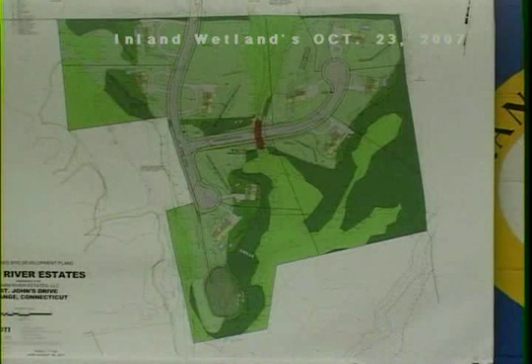Robert, you have more? I believe we've got one outstanding question from Diana with regards to the alternatives and looking at a bridge crossing for this general area up in here. Now, as part of when we took a look at the design options.

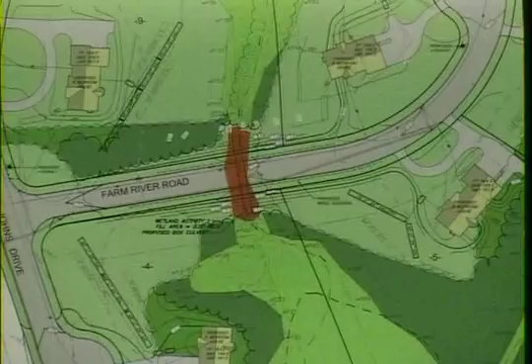Could I interrupt for a minute? This issue with Ed Lieberman, how was that going to be resolved then? Well, the only item that we have is that paragraph 1B, and I'm fully confident that what we've shown on the maps is the correct and proper way to do it. We will have to obviously meet with him, go over things for a third time with him, and then hopefully he'll be able to provide a favorable letter back to this commission. Okay, so we would get a letter back from him, one way or the other. Certainly, the letter's beyond my control, but that's certainly what we would hope to accomplish.

Scott, are you with us on that? That correspondence from Ed may be at least an indication of satisfying the question that Jim just had? That is something I anticipate coming, but given that it's something that is coming from staff within town, you can't force him to write it. Well, I wasn't going to say that. What I was going to say is that if anyone was inclined to hold up their thoughts on this project as a result of that, it's not necessary to do so, is all I'm advising at this point.

So, again, as far as the topo maps that we have on file in the town hall depicting the elevations, they were done in 95 by FEMA, and they're extremely accurate to within a half a foot. So again, I feel, at least for lots 4 and 5, that because of the topos and the slopes, flooding is not going to be an issue towards any of these properties. So take that for what it's worth. But certainly, yes, at some point there should be a letter coming down from that office.

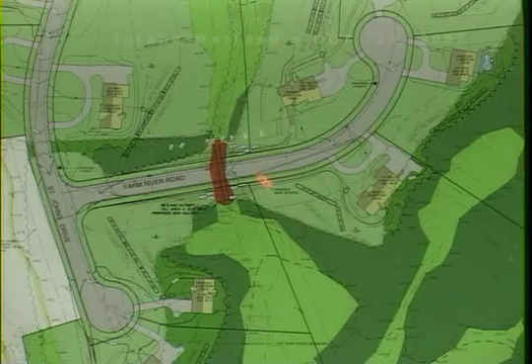They do convey water down across this crossing. If we were to get into a clear span provision, we would lose that ability to convey this stormwater runoff from this area here to the detention basin. So it would make providing for that zero increase in stormwater runoff from a peak discharge perspective virtually impossible, because in essence this crossing gives us the ability to convey water from this ridge line in this upland area from point A to point B.

So that was one of the other reasons why we really didn't consider the clear spanning of that wetlands system to be feasible, because then that would negate the stormwater conveyance within that area there. So those were basically the 3 or 4 options that we looked at, and this is what we arrived at, and we felt that this was the best compromise between environmental concerns as well as drainage concerns in coming up with the 5-foot by 8-foot box culvert.

Robert, if I recall correctly, that's about 3,000 square feet to be filled. What is the greater area of disturbance for all the work that will be needed while the fill's going in, the construction of the road, putting in the catch basins, in that red-lined area? What is inside that red line, that represents the .07 acres. Yeah, well, that's about 3,000 square feet that will be, as you call it, filled. But what about the work that's necessary? That area includes the work.

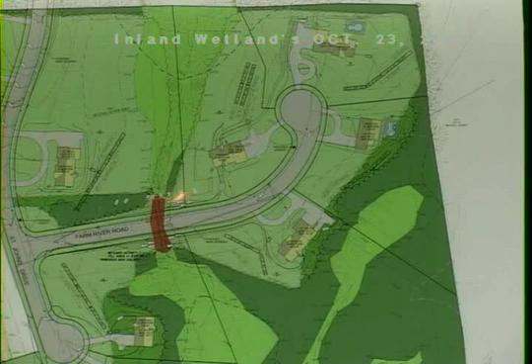And again, with the type of structure that we've got proposed in here, you're not going to go through the level of disturbance that you would if you were trying to put in a bridge structure here. It's a relatively small box culvert, 5 by 8. It's not an excessive weight. It's something that a normal backhoe should be capable of placing on site. There's no special foundations required for this. There's no special footings at all. Basically, it'll be to get into this area, excavate and stockpile the wetland substrate material for reuse within the culvert once that's placed.

What's the third dimension of the 5 by 8 culvert? Does it have a length? I believe it's approximately 96 feet long. Thank you. Anyone else?

Yeah, the box culvert will have some kind of structure to carry the stormwater runoff through it? Well, the box culvert is basically, if you can envision, 5 feet high. This board is roughly 3 feet high. So the height would be up to about here. Try to talk to the mic, please. Okay. So the height would be up to about here, and this board is 4 feet wide, so it'd be double the board through here.

Now again, the bottom of the culvert, what we're anticipating, the bottom 18 inches of the culvert is going to be filled back in with that wetland substrate material. So it'll help maintain the integrity and the regime as what's upstream and downstream to help with the environmental and the migration going through that area.

So the catch basin piping from CB8, I guess it is? How does that pipe... You're referring to this catch basin running here? Right. That catch basin piping will actually be on top of the box culvert. It won't go through it or under it. That's been designed so it's actually up above it. If you look at the topos, you'll see there's about 4 foot of cover over the top. Okay.

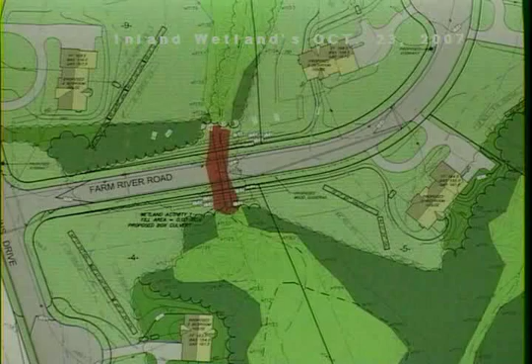So what's the grade in top of the catch basin pipe to grade? The grade of the road, just by way of example, the catch basin in this area here is approximately elevation 162 for the finished grade. I think the other issue, and what you were talking about, is you've got the 4 lots up here, and basically it looks like it's on top of a little hill. And no matter what you do, you've got to get that water out of there. It's got to go someplace, otherwise you're going to start pushing it towards too many different spots in the wetlands.

I mean, if you looked at, let's say, just lot 6, if that's higher, if you don't have this structure here, like you said, if you have a bridge, you're going to lose that ability to pull that water back across down into your detention pond. Right. And otherwise, what are you going to do with the water? You're going to start shooting it out into...

Well, yeah, and again, that's part of what we looked at in the design process, and with the area that's up in here, and the nature that there really isn't one common discharge point from this 4.7 acres of land. There was no easy place to collect it all in one place to try to get, say, a secondary detention basin up in here. But this area being at a higher elevation than what we're looking at here, it seemed to make sense to try to get this roadway system and the immediate area around it to collect as much of it as we could and then convey it down to the detention basin.

Anything more, Robert? I think that's it, unless there are other questions from the commission. Commissioners, any thoughts or questions? Robert, I have several, actually, that I'd like to use your expertise in referring to the drainage report. Reading it, it was perplexing to me because there were a lot of abbreviations that I don't understand. For example, what's the difference between a TR55 and a TR20 calculations?

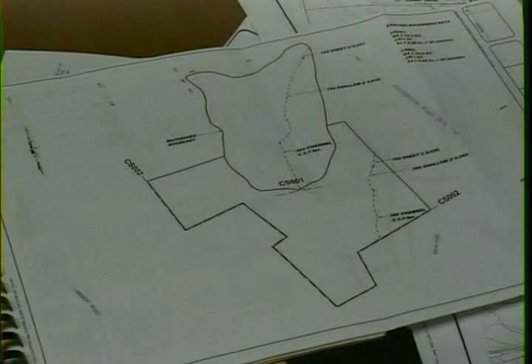And then if you look at the data that goes with it, there's a drainage area that's associated with that outline, there's a runoff curve number, which is associated with that drainage area, and a time of concentration. And those are the three principal components that get plugged into the computer program to do the modeling, which then gives you the peak discharge rates and runoff values associated with it.

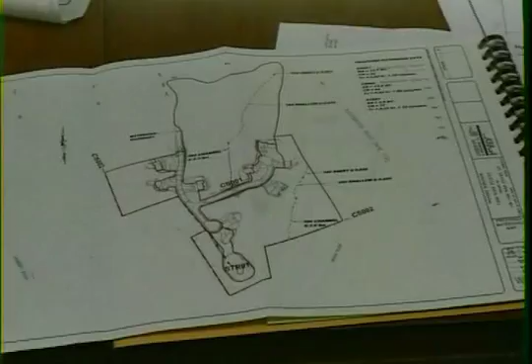If you take a look over on the next page, which is sheet 20, that's basically the same thing, except these are the proposed conditions. So we still have the cross-section 001. And if you take a look at the fine print, what you would notice between the pre and post, the drainage areas are slightly different. Because again, some of the houses and things like that are taken out from the pre and post, so there's a little bit of a difference there.

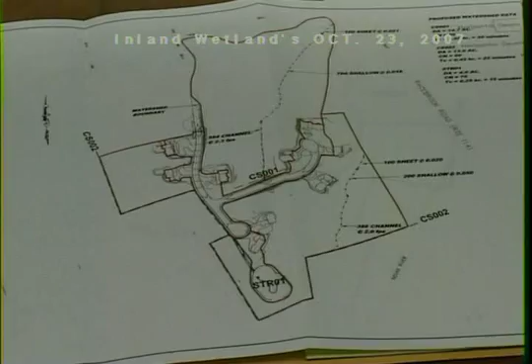And what's probably most prominent on there is that STR01, which is in essence the detention basin on Lot 3. So that's put in there for modeling purposes, and to basically come up with peak discharge rates that would be going out of that, as well as coming up with the stage storage discharge relationship for the storm event.

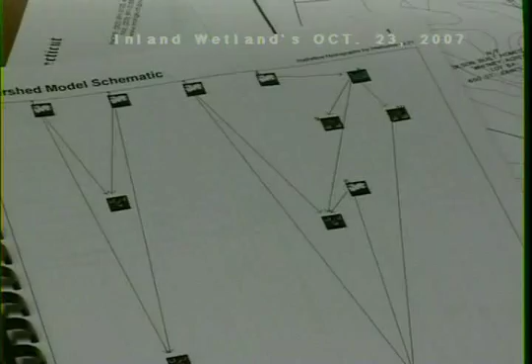What is on 2 pages after that? The watershed model schematic. Yeah, as you see, it's this, if you can see it. A bunch of computer gobbledygook. What is that? This is basically the computer program, the way that they give you the schematic model, which if you were to take a look at the 2 watershed maps that you looked at before, it's pretty much the same thing. It's just shown in more of a block diagram.

So all the way over to the left, you have where it says 1 and 2 up on top. Those are basically the same thing. And if you look at the designations, like 1 is CS001. Right. Block number 2 is CS002. And then you could just see how each of those hydrographs are pulled together and where they basically flow in terms of the computer program. So the arrows are flow of water? That's what I didn't understand, what the arrows were pointing at.

Well, if you take a look at that block diagram 1, okay, that represents that cross-section 1, which is that larger watershed area. And what it does, it calculates... Let me, if I can just interrupt, I don't know if you can show for the viewers at home what I'm talking about. I have no idea what that means. You got that? All right. I'm sorry, I was just totally confused.

Right, so what that's basically showing is that for block diagram 1, that is a drainage area, it computes a hydrograph at that drainage area, and that's it. So after it computes the hydrograph at that point, it needs to know what to do with that flow beyond that. And that's where that secondary arrow comes out of the bottom of that. It shows how that hydrograph is combined with the other ones and routed through. I just don't like the depiction. It's just arrows pointing to boxes that look like clouds and red dots. Sorry. I'd like the map better.

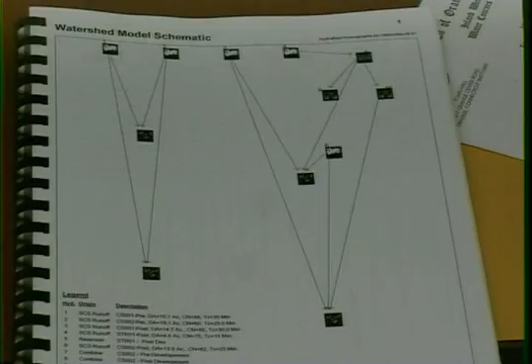All right, let's go to a hydrograph report. Let's skip all the way to the 100-year storm, the big one. And if you'll just run us through one of those, please. Do we have a page number you want to start on? Yeah, if I remember correctly, it's in the 60s, 56 to 60, something like that. Let's look there. No, I think we're probably more up in the... Is it higher? No, it's in the 60s. No, we're up on page 78.

Well, before you go there, let me start, there's one before that. Oh, wait a minute, I'm looking at the top of the page, rather than the bottom. Yeah, look at the bottom, the bottom is what's really indexed better. Yeah, then that's page 83. At the top, it says 61, the bottom says 83. Right, okay, actually, we're going to start back up a few pages before that on 78. Good. Works for me.

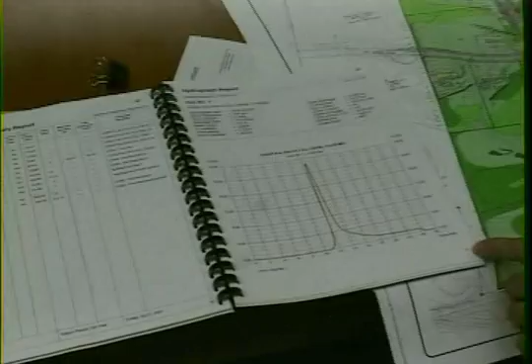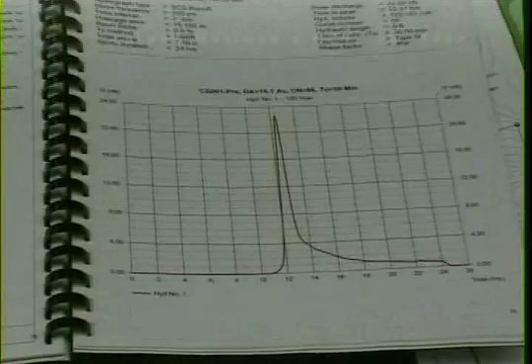And on page 78, what you have there is basically the hydrograph summary report for the 100-year return period. What you'll see listed in the table there is that you have 13 hydrographs that were computed as part of the computer program. These hydrographs contain both the pre and post development, so you do have to take a look at the hydrograph descriptions to really have an idea of how everything is pulled together.

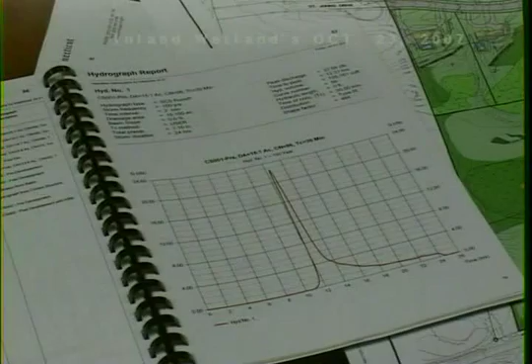So if you were to take a look at the summary report, and again, all this remains consistent, if you look at the hydrograph description, hydrograph number 1 represents cross-section 001. If you take a look in there for the 100-year storm, at the third column, the computer program has calculated a peak flow of 22.6 CFS. Then if you bounce down to the second one, which is CS002, it's calculated a 100-year peak flow rate of 34 CFS.

Now, if you want to take a look at the combined flows for those two hydrographs, where it basically gets the two of them combined, then you're gonna bounce down to hydrograph number 7. All right, stop right there. Let's just pick the very first one. If I'm looking at the graph on page 79, that corresponds to the first one. Going across the bottom, you have 26 hours. What is happening in the first 10 hours? Nothing? Pretty much. I'm sure if this commission has asked for these reports from other applicants in the past, these graphs are pretty standard and typical. Yeah, I just want to understand it.

It's characteristic of a Type 3 SCS storm, where if you look at that spike that typically occurs between the 11th and 13th or 14th hour, what the models and formulas tell you is that the majority of your rainfall event occurs over a very short period of time, over that hour and a half or 2 hours. So even though it's referred to as a 24-hour storm, for the purpose of the modeling and for generating peak rates of discharge, it's assumed, and it's characteristic of the shape of this curve, that the majority of that rainfall occurs over a very short period of time.

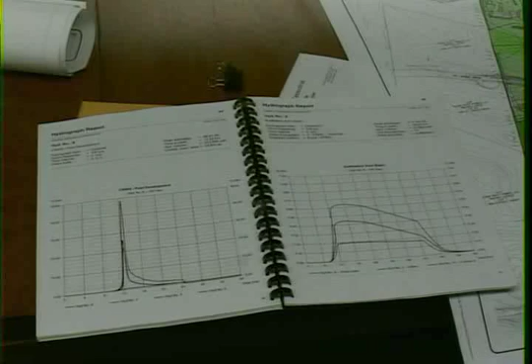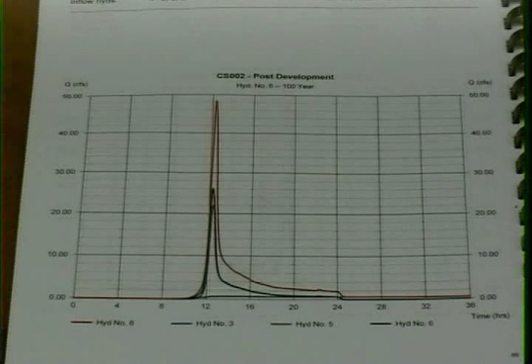Okay. So the one that you're looking at on page 86 is hydrograph number 8. This is a post-development hydrograph, which combines hydrographs numbers 3, 5, and 6. Just for your point of clarification, that is combining CS001 post-development, Structure 1 post-development, and then it's also providing for the routing through Structure 1, which is doing a reservoir routing. That's why you've got the multitude of curves on that area. If you take a look at the red line, which represents the peak up around 48.1, that is the culmination of the two hydrographs coming in. So that would be the summation of cross-section 1 and the detention basin.

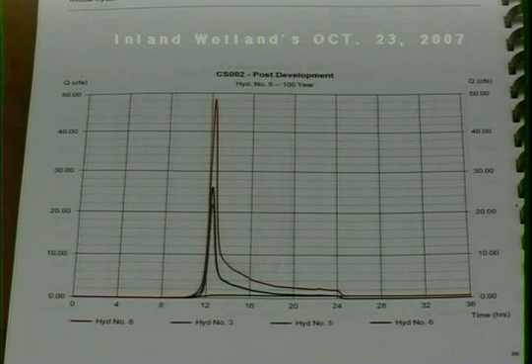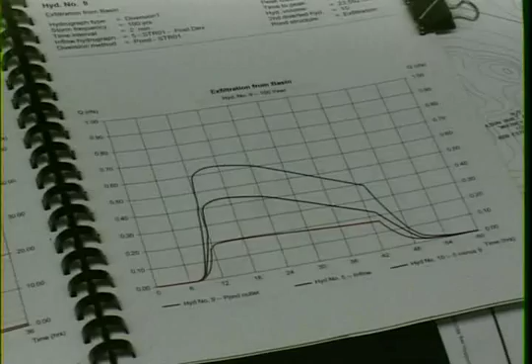And what does page 87 show then? Now, page 87 shows that one of the analysis conditions that we looked at was if we considered exfiltration going out through the bottom of the basin, which we ran as an analysis. It's not what we based our summary numbers or tables on. But this is what the exfiltration rate through that detention basin would look like if applied to the hydrographs for

that particular basin. Is that what you use to determine whether it's going to be breached? No, this has nothing to do with the breaching. What this has more to do with is taking a look at volume from that particular area. So if the bottom of that basin has a gravelly, sandy area, in addition to storing the water, it also has an opportunity to percolate out or infiltrate into the ground around it.

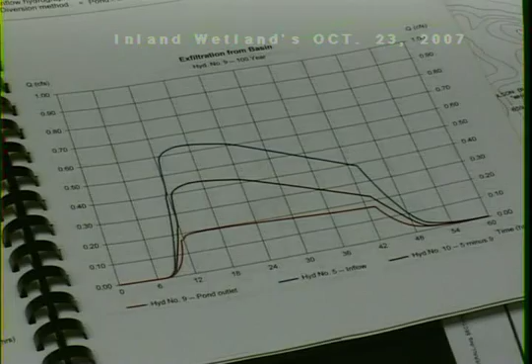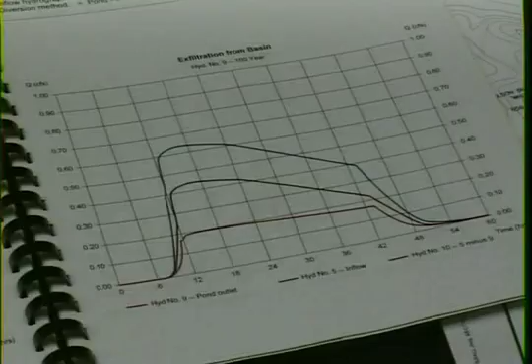Now, normally when we do the design analysis on this, and that's the case in the summary numbers that we've given you in the report, we go on the assumption that this basin has like an impervious liner, whether it's plastic, concrete, or whatever. No water goes out through the bottom of the basin. The only way water gets out of the basin is through the control structure itself. And that's quite honestly the most conservative way to design it, to assume that you have no water infiltrating into the surrounding ground area.

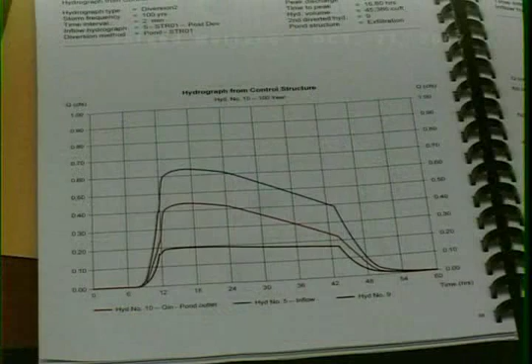So then the flip of that is if it weren't impervious, this is what would happen. Correct. Gotcha, now that makes sense. And what's the difference then, I think this is my last question, on page 88, from the control structure, what's that versus the basin? Well, this would include the peak discharges leaving the control structure in this location. So this includes the water going out through the control structure, as well as what would be infiltrating into the ground. So it's a combination of those two. That's combined, right.

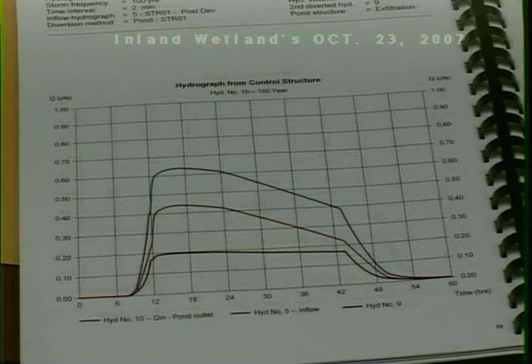They are similar, and it looks like you did it over 60 hours. That's enough for now. There was a footnote I wanted to ask about, but I don't remember where it is. I'll find it. If anyone else wants to jump in, please. Diana, please.

On page 4, you've got the pre and post peak flows. So following up with the 100-year storm, it looks like the existing is 49 and the proposed is 34. Right. Do you have hydrographs that reflect those so that we can compare the hydrographs? Certainly do. All I gotta do is find them. Oh, here it is right here. I don't know what this means. What the heck does that mean?

Okay, for the existing conditions and the 49 CFS, it's basically going to be any of the hydrograph 13s for the 2 through 100-year event. So if you're looking for the 100-year, just bounce back to that. That's going to be on page 90. That would be the combined with the post-development. And then on page 89, that would be the combined with pre-development.

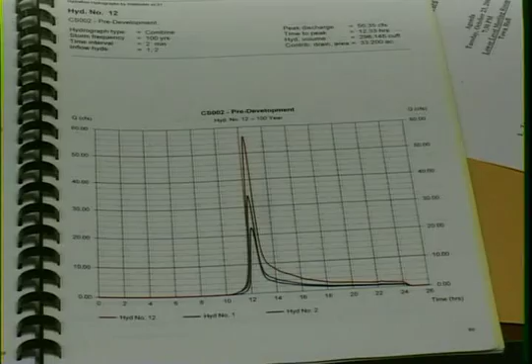part of this report. In designing the peak flow rates, we didn't consider any infiltration or exfiltration from the detention basin in the calculations. In terms of runoff volume, we've got the rooftop galleries, which have not been factored into the calculations, so that tends to be very conservative. And I'd have to find the numbers, but we took a value based upon the percolation test we had out there for the septic systems and applied a safety factor to arrive at an anticipated infiltration or exfiltration rate out of the basin.

And that's where some of the other charts that we were looking at came in. So if you go back to the summary tables, there would be runoff volume actually calculated in those tables that goes back into the ground. I don't believe in the report I actually summarized that, though, to see if we met a zero increase in runoff volume. But like you said, if you take a look at the hydrographs, they're reasonably close.

I did find the footnote, it was on page 4, under the combined flow, and it just says footnote number 1, right at the very top. If you could read it and explain what that is. Yeah, that's very easy, and this is quite common. The thing that quite threw me, it says it's to the perimeter of the property.

Right. What the footnote says is flows indicated are for point discharges. For this particular watershed, the flows are dispersed along the perimeter of the property or watershed boundary. Okay. Probably the best way of looking at this, if we look at that area for CS 001, which is basically the area that's tributary to the roadway crossing, that would be considered a point discharge because that entire watershed area culminates right here. So everything comes down to this given location.

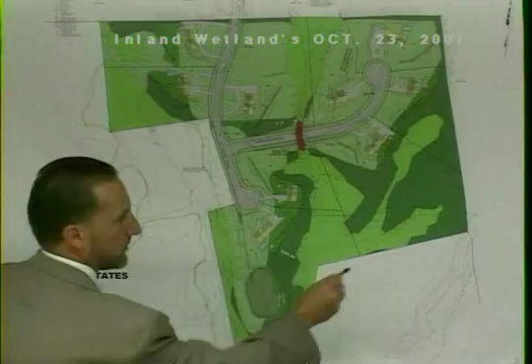So if the calculations say that we have 20 CFS for that given watershed, that 20 CFS occurs right at that point. Now, when we take a look at cross-section 002, which basically comes around the perimeter, if we have that same 20 CFS for the sake of argument, it's not at any one given point. It's dispersed along the perimeter because there is no single point discharge leaving that area of the site.

Oh, I see, because that's only talking about cross-section 002 at that point. Right. Gotcha. Because if you're going to try to get all this down to a common point, we'd have to analyze a much larger watershed that would include a lot of the offsite area, which really has no bearing on the sizing of this basin.

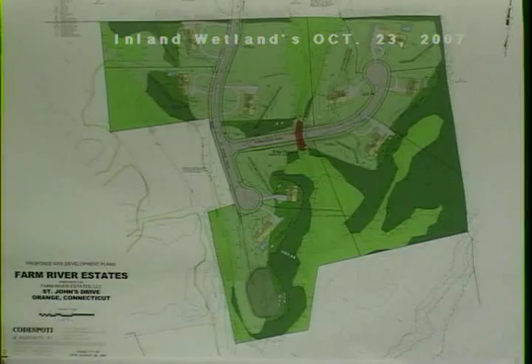I'm with you. Anyone else? Scott? Diana?

I have some questions about consideration of alternatives for specific lots. On SP3, on the soil erosion plan, the silt fence is pretty much the limit of disturbance, I'm assuming, and in some areas, like on Lot 5, it's 8 feet. On Lot 4, it's 15 feet? Diana, help me there. What's on that lot 5, 8 feet? The limit of disturbance to the wetland. If you look at the erosion control plan, you can see that. Okay. Now, that vegetation there that's going to be cleared, is that full-size trees over there?

Well, let's back up for 1 second. I think Mr. Codespoti hit on this during his presentation. If you take a look at the existing conditions of the site, and probably your colored-up drawing would be the best one there, the vast majority of the site development is not taking place within the wooded area. Almost all the roadway construction and the houses are within the farmed or cropland areas. Even on Lot 5, the house itself is within the cleared area.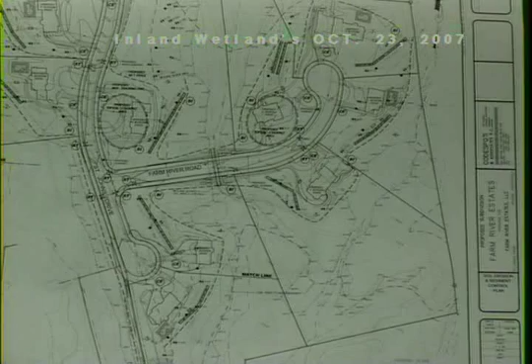Yeah, as far as what would be lost in that area, we haven't done a tree count or to know the actual locations of which trees would go. The one comment that I would make is just given the orientation of this area here, I don't foresee that there would be any direct impact to the wetlands here because any of the canopy that's lost in this area here would basically be on the northerly side of the wetlands. So in terms of the loss from additional sunlight being introduced into the wetlands, I would be more concerned if you're losing tree canopy on the south side of the wetlands as opposed to the north or west side of it.

Well, it is the west side too, but then it's not just that, it's also the activities there to put the gallery in and the grading. We're removing the microtopography under the trees that slow the water down, clean it, cool it before it gets into there, and then it's just going to really be lawn. I'm just concerned about the closeness of some of these to the wetlands.

Similarly, Robert, did you ever do any calculations or come up with a quantitative measurement of how much water a tree may drink such that if you remove trees upstream, the downstream people see the result that their water rises faster? I've never done any. Yeah. I don't know if Mr. Abrams is here. He may. Yeah, well, I don't know if he could venture a guess. I can't quantify it either, but I'd be very concerned about the number of trees being lost as well.

Robert, I have a question. I think the last time that you were here, I had asked the question about, technically this is hypothetical. I mean, each lot, the house that you put on is a hypothetical situation, meaning that you'll sell one lot, someone's going to have to come back in with a plan and talk about it possibly from that point forward. Are these houses and driveways maximized to whatever the degree is that they can be built as big as they can be built? And were those the calculations that were used for figuring the runoff going down into the detention pond?

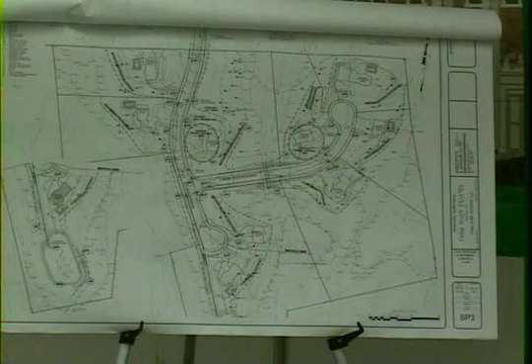Lot 9 is, I'm trying to find it, it's a couple acres, 3 acres or something, I believe. For you to sketch on the back of one of these drawings the starting contour of where the bottom of the culvert would be, and then what the final contour would be relative to what's

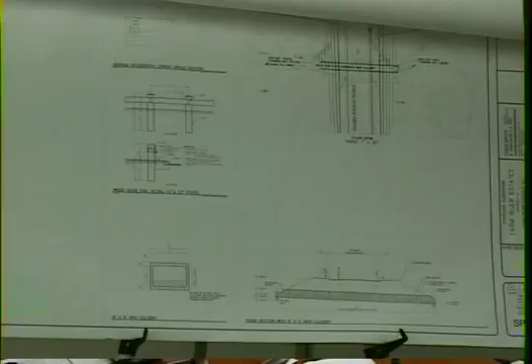The drain coming through looks like it's 152 feet. That sheet has to be 8. I must have an old drawing, because I don't have. Must be 8. Oh, because it's tilted down. It's tilted. I was wondering why they were two different on each end, of course.

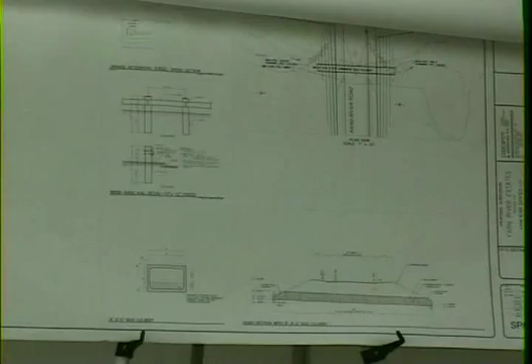Bob, I don't know where Commissioner Ewan wants to go with that at the moment, but while he's pondering that, I do also, after my site walk, have some really great concerns with Lot 5 and the location of that house and its proximity to the wetland. And I was curious if there was any other way to reposition the house on the lot to pull it away. I see it is quite close to the 50-foot front setback.

But can it be relocated, downsized, septic put in another area, something, because it's just not going to work, in my opinion, for the people that are going to live there. It's just not what they're going to be expecting, and I'm sure this is going to be probably a $1 million edifice by the time we're done, and they're just not going to have any yard, period. And I foresee that it's going to be turned into lawn area before anybody even knows it. I'm really distressed by that.

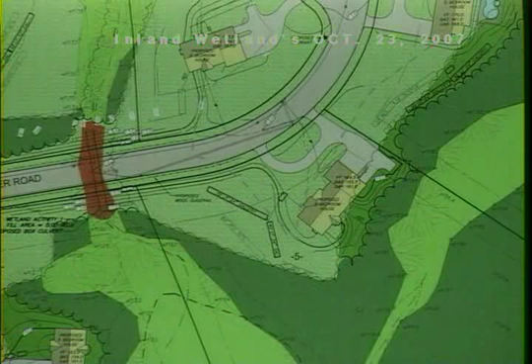I had a concern with that also, because when I looked at the driveway, the contour line that follows pretty much just to the corner of the house there, it's like at 162, and then it drops to 160 when you're going back towards the wetland area. By the looks of it, you're almost going to get down to maybe 154 by the slope of the driveway there. And I'm sure there's ways to build it up and to pull the water back out, but again, that looks like a quick exit down to the wetland area down there.

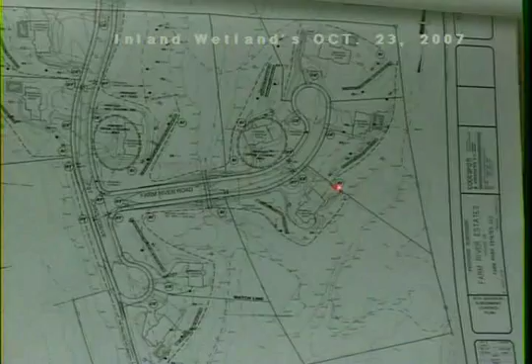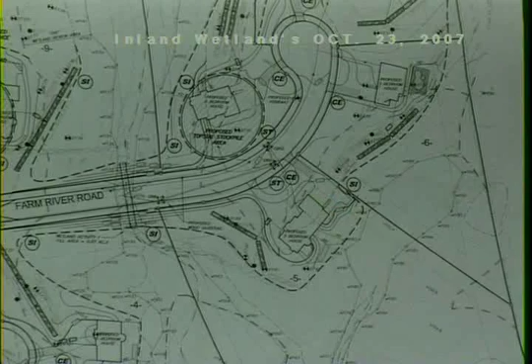Well, actually, up in that corner, there's a small retaining wall at the end of the driveway. Because what you'll see is that just on the uphill side of the garage, you're at elevation 162 with that contour. And the driveway grades are going to carry down to right where the 160 is. And that's basically the flow path for the runoff from that area. But right at the hammerhead on that driveway, if you take a look at the grades that drop down, you'll see how the contour lines blend into that solid line there. That solid line would represent a small retaining wall to help with the grading transition

in that immediate area. You mean as far as bringing that back end up? Right, that's what I thought. Well, yeah, it's not going to bring it back up and pitch it to the road. But instead of having a very steep driveway leading down to the wetlands, you want to have that relatively flat so that you don't have any problems with vehicles and icing and things like that. So that's why this is relatively flat in here, and then this slopes off in a more gentle way, but right at the hammerhead, because that tends to compress that area, you'll have a small retaining wall.

Well, it gets into, if you just looked at plowing in the winter, salt or whatever could get put into that area. If it gets pushed and you do have a small retaining wall, it gets pushed over the retaining wall down towards the wetlands. It's not that far from that. Yes, you do have a buffer zone with the trees and stuff. I don't know that there is. Right there. Yeah.

That's one of the things I just noticed, that's all. Yeah, I think to address Scott's comments, we did have an alternate for lot number 5 that we looked at, where we basically had the house mirrored and flipped around, but it really didn't gain all that much, because what it tended to do is push more fill over towards the septic side. And I think in terms of just having a usable backyard area, it got it that much closer to the wetlands as opposed to what was laid out there.

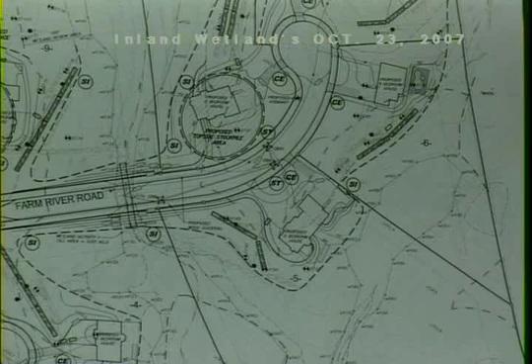Let me check in my folder and see if I have that sketch, to see if it's something that you may have been looking for. And was that the only place that deep test holes were done? I'll wait for you to get back. I don't have much choice. We're going to take a look to see if we have that alternate sketch.

Well, I'm looking at going across the driveway area. I don't see any test holes there. Were any test holes dug in that area to see if the septic could go on the other side and this house be rotated so that it was cocked in more towards the stone wall? No, because initially when we did the lot layouts, we did take a look at that. And because of the spread lengths that were available up in that area, it wasn't an area that was really conducive to trying to lay a septic system out. We just didn't have enough length to go back in that direction.

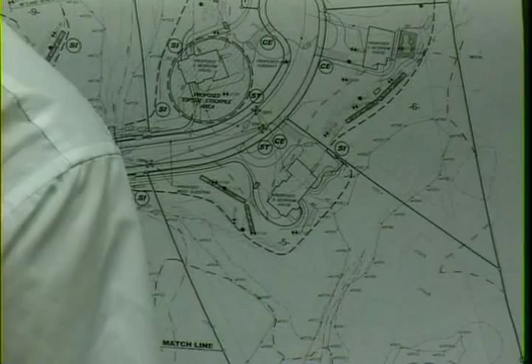Scott, what is the distance, your best guess, from the house to the wetlands on lot 5? Sorry, what is your distance? Scale? It's also got more sides on it than I want to guess at. Well, we're at a 50 scale here on this one. Which is the 50 scale? Help me, I don't know. That'll be easier. Here, try that. But I'm going to guess, without even looking, it's something like 40 feet. It's not even 50, might even be less than that.

But from the house on lot 5 to the wetlands? Yeah, I don't have my scale now. Here, use this one, it's bigger. So it looks like the house is at least 50 feet away. Yeah, the house itself is, but your point is, if the driveway's closer than that, there's no yard, snow plowing, and to the extent that a new homeowner goes in there, what is the future of that area going to be? The grading below the driveway is about 20 feet. The gallery is about 25 feet.

You know, once somebody gets in there, they're going to want to put lawn as far as they can get it. And there are other properties that are very close too. There's lot 4, lot 2, where the footing drain is outletting, although that can be pulled back, but I'm concerned there too about the trees that are having to be removed right up to the wetland, it appears. And then the basin is fairly close. It's about 30 feet. And lot 4 I said was 15.

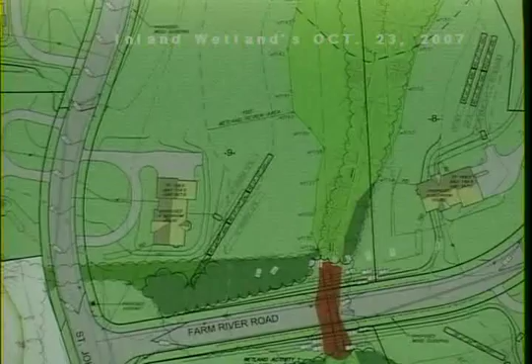Do you plan, in the areas where you're going very close to the wetland where there is not a buffer, for example, on lot, what lot is this one? It's hard to see, 6. Is it 8? Maybe installing a buffer, you know, trees or something like that to identify the limits of where their lawn would be established. Yeah, in other words, you're talking about the western boundary of lot 8 up here? Down near the house and up there, yes, all along.

Up by the septic, yeah, because primarily the edge of the wetlands is almost on that cleared wooded area that exists on the site now. We don't presently have anything shown on the drawings to provide for any demarcation in that area. Well, I think it also talks about human nature, and Scott can probably attest to this, of people just thinking of the wetlands as a place to dump mulch and whatever else they can put in there, just because it's out of sight, out of mind.

If we had some decent distances between the activities and the wetlands, we'd have a little more of a buffer to protect from that, but because they're so close, you can't possibly protect them at those distances. Is there any reason why Lot 8, the house, can't be slid eastward or northeastward towards the cul-de-sac to pull it farther away? Shorten the driveway in essence.

Well, yeah, the front corner of the house on Lot 8 right now is at the front setback line. For which one, is the driveway being the front, or the radius being the front of the property? This corner right here is virtually sitting on the setback line. Yeah, right there. This corner is sitting on what? Setback from the road, yeah. Oh, as far as how far it has to be from.

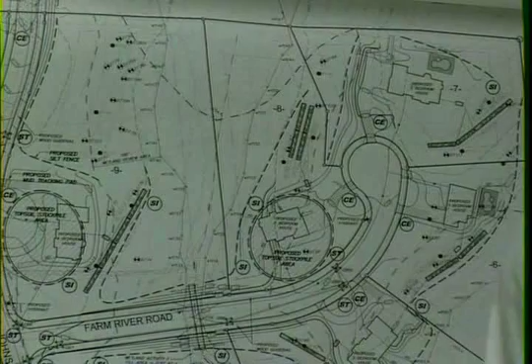So, okay. In any case, it appears to me that every lot is within the 100-foot upland review area, so maximizing the distance from any wetland, based on these tight configurations, is going to be needed on every lot. Usually we're looking at particular ones, jumping from lot 3 to 6 to 8. In fact, you just have to look at every one and try to make it as far as possible, with a consideration that there may well be a desire to seed and mow lawns in the future.

Well, even the infiltrator's on 5, for crying out loud. Is there any reason why they can't go to the front of the parcel? I believe you gotta be 25 feet from the septic with the infiltrator. Well, you gotta be 25 feet, and typically we like to get the infiltration galleries down gradient of the house. If you start putting them up gradient of the house, number one, it's gonna become more difficult to get the roof drains into them. And number two, you don't want that to have a tendency of migrating into the basement either.

So if you locate the infiltration galleries on the uphill side, they need to be spaced much further away from the dwelling unit. Well, even in that case, it could be moved down there, past DT 92 or whatever that is. Although maybe that's not far enough from the septic reserve. Yeah, there might be a little bit more room to tweak that and get that around the corner here. At the end of the day, that's still going to start to cut back into your wooded area back in that section.

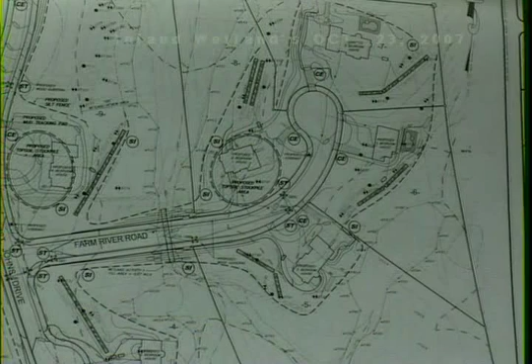Where you show your 40-foot reserve area, there's a stone wall there with almost nothing in front of it for vegetation, and if that roof drain infiltrator could be rotated around into that direction, you're still going to be working under the same contour, 158, I believe it is. That would really help to eliminate a lot of disturbance on the back side of the house, and the other option is to put a line in the sand in the form of a retaining wall across there, and that would be the end of the disturbance, and fill up against the retaining wall rather than have it slope off.

Not quite following you on that one. Well, you've got existing contour, I think it's like 156, grading is pushing in towards the 154 contour as it comes into the wetland, so at that 158 contour, with all the fill that's going to go on over here and the grading that is going to be required, because you've got a fill line right on that 156, realistically you could put a big, nice level area with a retaining wall and fill against it right about where your infiltrator is shown, heading towards the DT92 test pit there.

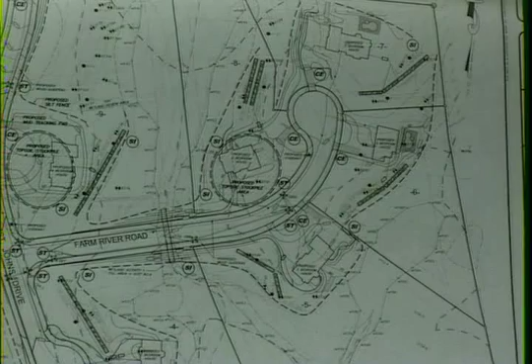And that would keep everything and everybody from wanting to encroach into that whole area. Along the contour of the silt fence then? Or not the contour, but along the silt fence line? Well, even that's too close, in my opinion. Yeah, okay. And again, when you say the fill, it's not that you have a tremendous amount of fill. If you take a look at that

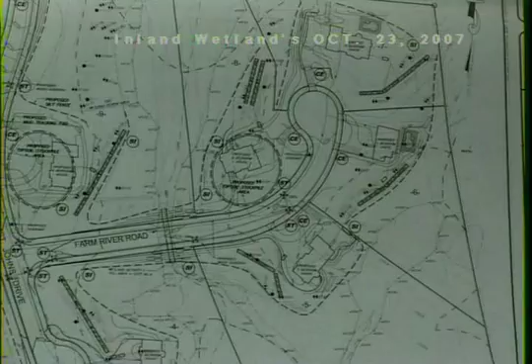150 contour that comes up through, or I'm sorry, the 160 contour, if you look off that back end of the house, that's only a 2-foot fill there. Because you're showing the 160 contour going over a 158, so it's not that you have a tremendous amount of fill there by any means. But you got to grade it out, and that's wherein lies the issues.

I mean, sure, 2 foot this way is fine if you've got it held off with a retaining wall, but 2 foot this way, by the time you grade it out, you're down to 6 feet. And I think that's the point that we're all trying to make here. This limit of disturbance is just going to head right in there. May I make a comment? Mr. Cotespoti, please. Yes. We have no problem with that.

I think what this commission's concerned about is very legitimate in the sense that can there be some demarcation line between where the limit will end? Because this may not be the house that's built there. I don't mean that to be facetious, but we have no problem with that. The revision we can make, as Scott says, it could be a stone wall instead of a retaining wall, something attractive is what I mean. Absolutely. Yeah, we can do something very attractive and indicate that this is the limit of lawn, or whatever it might be, that this wall has to be built.

We don't have a problem with that, because we recognize that in order to be as reasonable as we can, there may have to be some limits that are placed for individuals who come in there, that they're aware of what those limits are when they go in. So having some type of retaining wall back there is not a problem. I don't foresee that being any difficulty at all. Scott? Everything's just going to head right down to that intermittent water course.

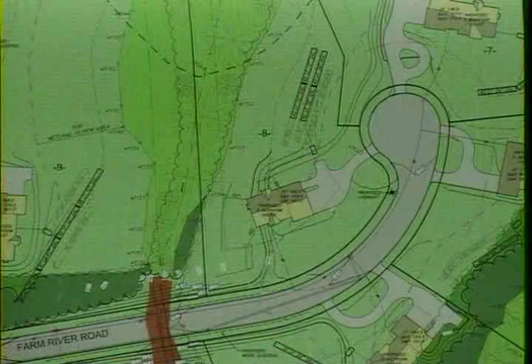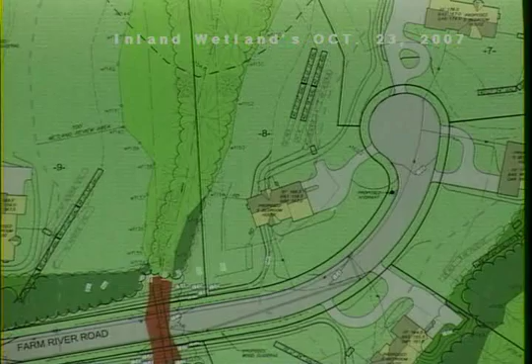Maybe I'm a little bit, see, what you're looking at, what I'm looking at, this is also where your proposed stockpile area is on my SP3, so it has a tendency to alter. Was this passed out, I'm sorry, that really indicates where the 50 and 100 foot, the 50 foot is because of the septic system and the 100 foot? I don't believe so. I passed out and marked my own, but I don't think that was passed out. It'll be a lot easier for you, because it's already shown where the 50 foot line is and where the 100 foot line is. So maybe you could pass those around.

The red line there is 50 feet, and is that one blue? My eyes are fading. Blue line is a 100-foot review area. And the reason we put the 50 instead of a 40, which you used to have as your review area, is because that is where the limits of septic system would be. Do you have another one for Diana by chance? I'll just send this one down. Sure, send that one down. We're going to need one for the file, though. I'll give you mine.

At a quick glance, you can see what's happening within the 50 feet. And the one good thing that we haven't really emphasized is that there'll be very little removal of trees in the area. But for those areas that are close to the wetlands, we're happy to take suggestions as to whether a stone wall or some other simple demarcation that will indicate the limits of any kind of activity. That doesn't present a problem to them.

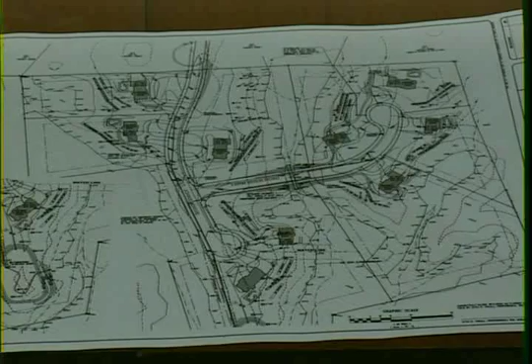Just to be clear, the blue line represents 100 feet from the wetlands, the red line represents 50 feet. Correct. I thought I heard somebody say 40. Not 40, the reason I said we didn't use 40, that was your previous. Right. Okay. Because the 50 is where you're permitted to have a septic system. It has to be at least 50 feet from the wetland.

I think one of my other questions is, if any of the commissioners know the property or walked the site, there is a farm crossing now, and I kind of wondered why they didn't use that area to put this culvert in. The topography is such that it probably doesn't lend itself, and I think it would have more of an impact.

But I'm wondering if those farm crossings should stay, or whether they should be removed if this box culvert gets installed, especially the northerly one. I mean, it's basically just a rubble crossing that the water travels underneath now. Is it advantageous to leave it as a velocity dissipator, or would it be advantageous to remove it and let the water continue to flow back down through as it once had in the past?

Where is that crossing? That's probably maybe 80 to 100 feet above the box culvert, northern end, and it's in the middle of the intermittent water course. On Lot 9? It would be on Lot 9. Actually, it's fairly close to the line between 8 and 9, maybe? Right. I'm assuming, Jay, you can probably confirm that a little better.

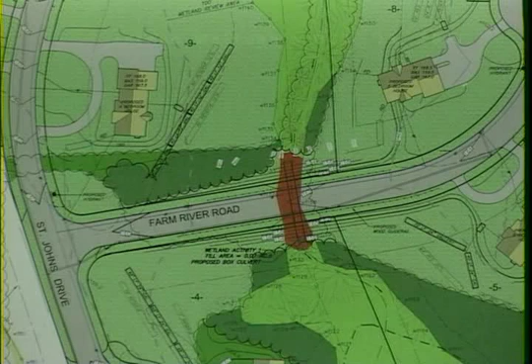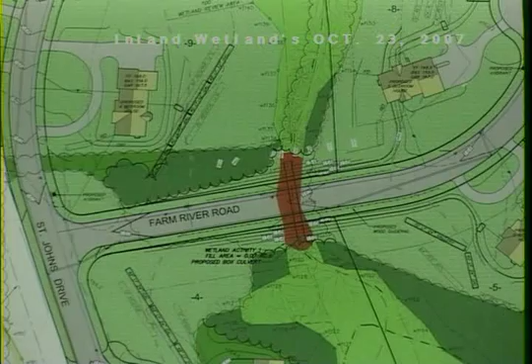But, Scott, that's not necessary. The first crossing, as we fill it, we can bring equipment in across. We don't have to use multiple crossings. If they chose to do it and it was there, that's one thing. There's no necessity to construct this road with multiple crossings. It just is not needed. We can start the filling of that wetland in the logical order.

Well, the reason I'm asking really has nothing to do with construction so much, but when you're out there and you look at the location of this crossing, there's the potential for the homeowner or their yard caregiver to go to that crossing, and here's this great ditch on either side that an awful lot of debris could be dumped into. So it almost seems to me like that crossing should be removed and the stream channel restored to what it was probably 100 years ago, as preventive maintenance against the wetland being used as a dumping area.

I think there may be alternatives to achieve that, but we love to leave things alone. You tell us to fix it, we can. Diana? Yeah, that's my concern too. If there's something that looks like a crossing, something they can get some equipment on, they will do it. Absolutely.

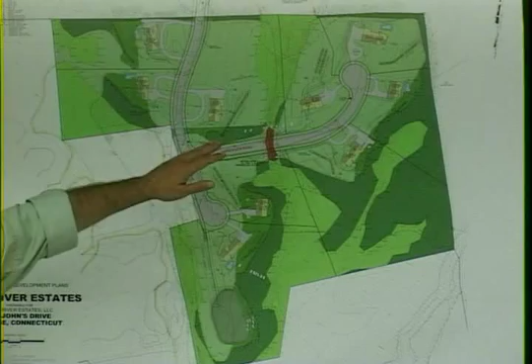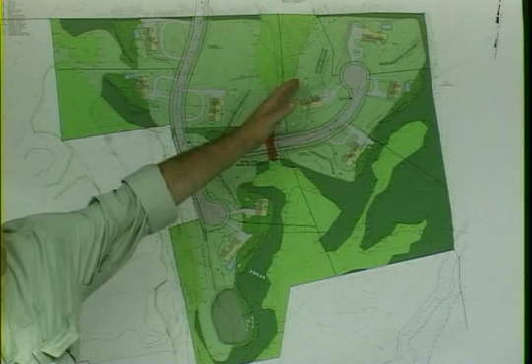In this area, if we were concerned about drainage, it would be possible to put linear drainage features that capture water coming from the developed area and carry it in the direction that management would dictate, which is downhill and not directly into a wetland. And then that water can be infiltrated into the ground.

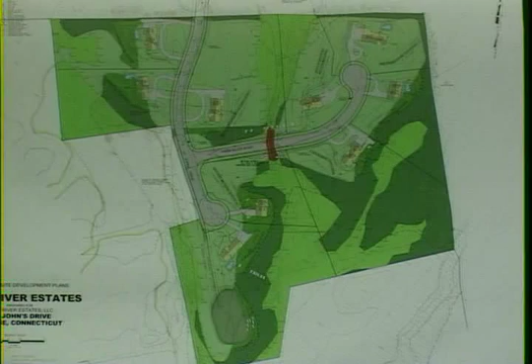There are infiltration structures used in this design, and they can be adjusted and enhanced, and I think that's something that Bob and I could discuss in lots that have been identified as having a concern. Diana? My main concern is the phosphorus going into the wetlands from the lawns, the herbicides going in there, the pesticides. So that's why I would like to see a buffer there that's not kept as manicured lawn.

Scott, what I was looking for is the original application for this subdivision, and there is a check mark here that they have provided us with, and some of it they have, but the sentence reads, effects shown on vegetation, wildlife, erosion, sedimentation, pollution, or flooding, if any. I don't know that we've heard anything about vegetation or wildlife yet this evening,

and I was kind of assuming that that's where you were headed, but if you don't have a report, I think it would be rather difficult for you to actually live up to this application requirement that the effect shown on the vegetation and wildlife has been satisfied. Well, I have performed the research necessary to produce such a report. Bring it with you next time. Anybody else?

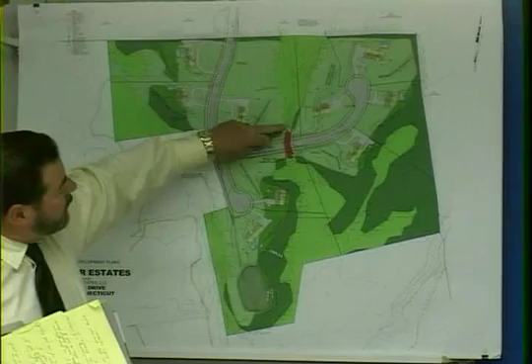Secondly, I wanted to just articulate a little bit on some of the discussions centered around the crossing and the amount of input and time and detail that went into designing this crossing where it is presently located on the map. If I can just point out that... You can slide that over, Scott. Maybe you could reach it a little more. His voice will carry anyway. There you go. This large wetland corridor feeds down into this funnel-shaped design where this proposed wetland crossing is to occur, and then it opens back up again.

As you can see, this really is the optimal point to have the crossing, and probably Mr. Ewing can attest better than anyone how long this existing crossing has been here, but I would venture to say upwards of 100 years, and maybe more. Yeah. The existing sand, rubble, and rock crossing, which is about 14 feet in diameter, has been used for many, many years as a crossing.

So to improve it to a road standard would not be a significant impact to the wetland, as opposed to installing some type of a bridge structure, which we've done a number of in different areas around the state, and Mr. Allen, I think, can attest to a couple of them that we did here locally on Old Tavern Road, which were much more of an impact to the wetland area than what we're proposing right now. Made me gray.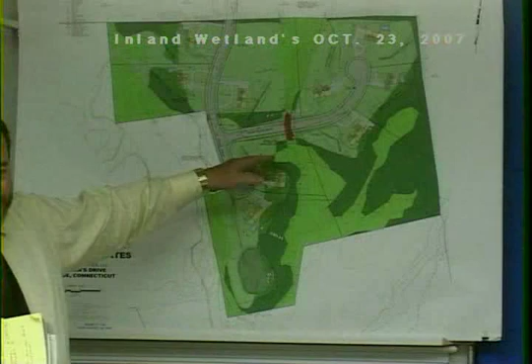So I would just like to state for the record that we did give a lot of thought, consideration, and time in designing the appropriate crossing for this area. However, if the commission would like us to modify it, we certainly would be willing and happy to look at that. And with that, I don't have any other comments for this evening. Thank you very much. Thank you, ladies and gentlemen. We will be back November 13th, same place, same time, 7:30 p.m. Thank you very much. Good night.

We don't need a motion to adjourn, but we will. And since Walter isn't here, would somebody like to make a... Drew, thank you. Someone second? Jim seconds. All those in favor of adjourning. But we are not closing the public hearing. Good night. Thank you. It's 10:10 p.m.